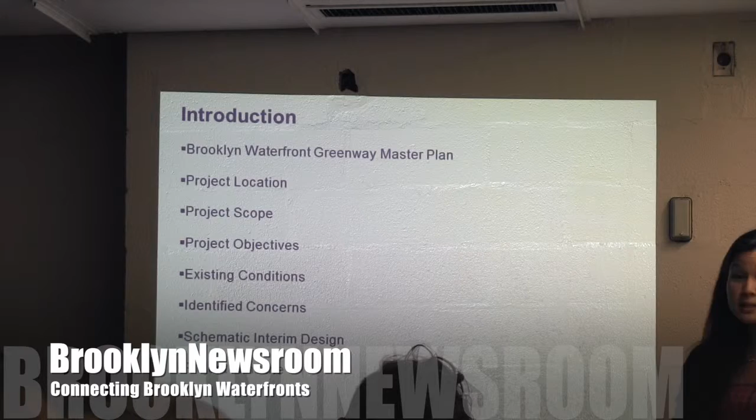A couple things I'll be highlighting in this presentation: I'll be covering a little bit about the Greenway Master Plan, project location, scope and objectives, existing conditions, some concerns we had during the preliminary design phase, the schematic interim design, and the project timeline, where we are today.

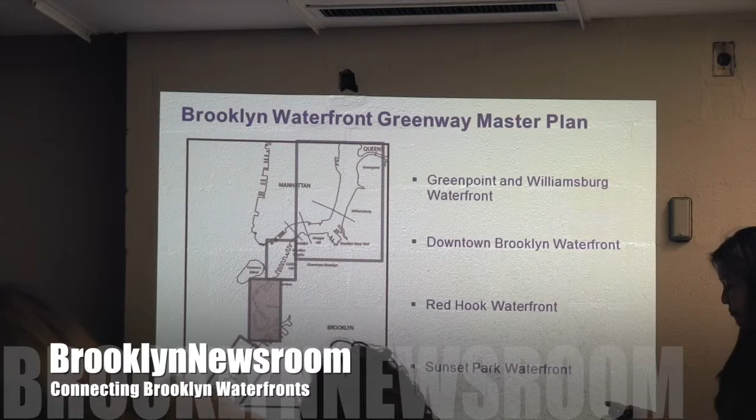There are 4 waterfronts in the Brooklyn Waterfront Greenway: Greenpoint Williamsburg Waterfront, downtown Brooklyn, Red Hook Waterfront, where the Valentino Pier project is located, and at the south part of Brooklyn, Sunset Park Waterfront.

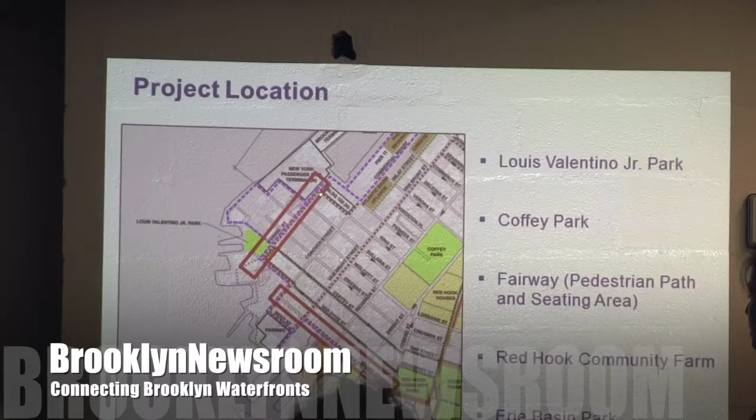The project limits for the Valentino Pier project are Ferris Street at Van Dyke to King Street, and Beard Street at Conover and just east of Dwight Street, about 200 feet.

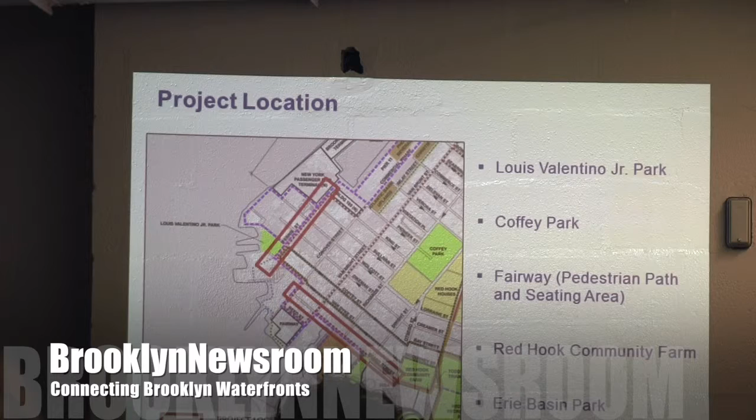A couple of key facilities I'd like to point out are the parks in the project area: Louis Valentino Jr. Park, Coffey Park, Erie Basin Park, the Fairway with pedestrian and seating area, and Red Hook Community Farm. All very close to each other.

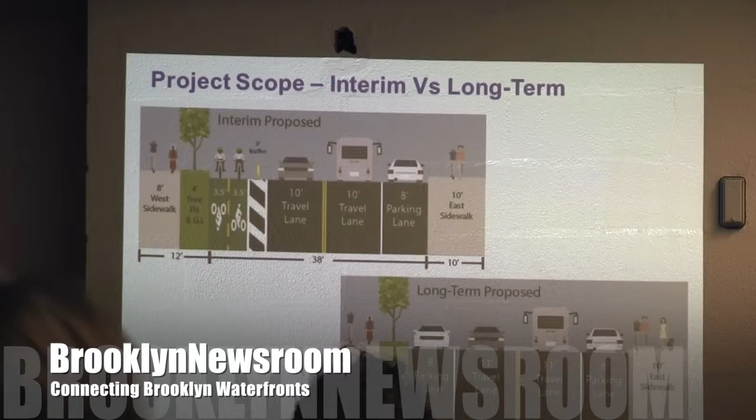The long-term proposed design is dependent on future development in the area. With future developers coming in, there's the possibility and opportunity to move the greenway towards the waterfront side, and the option of putting the parking lane back to 2-way travel with parking lanes on both sides. I just want to make that clear.

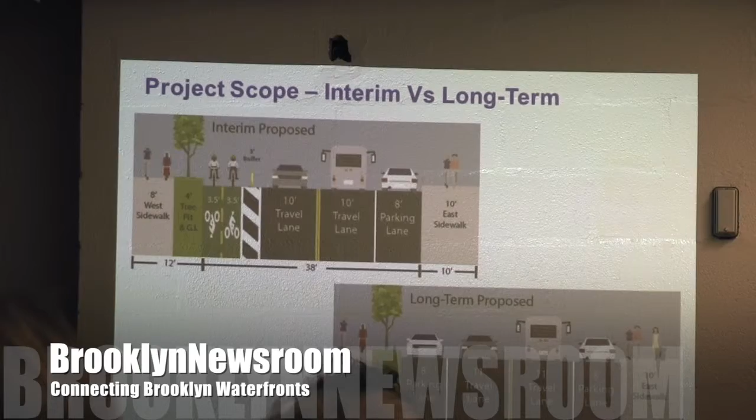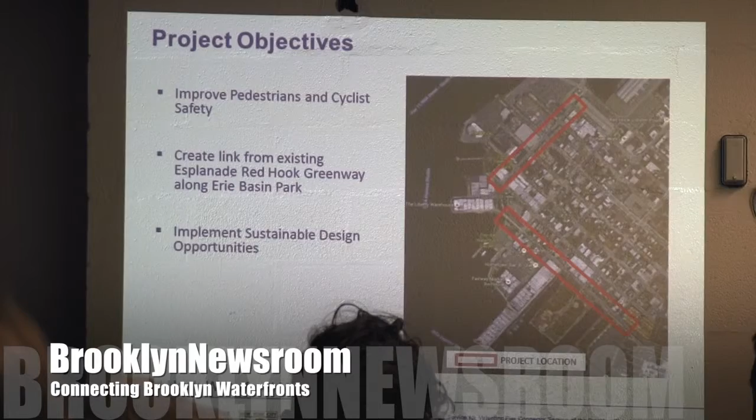Some objectives and goals we have: improve pedestrian and cyclist safety, connecting the existing Esplanade at Red Hook to the Erie Basin Park, and implementing sustainable design at every opportunity that we could.

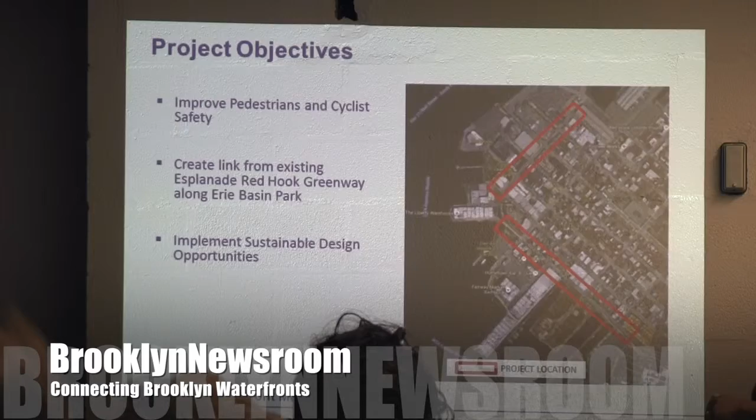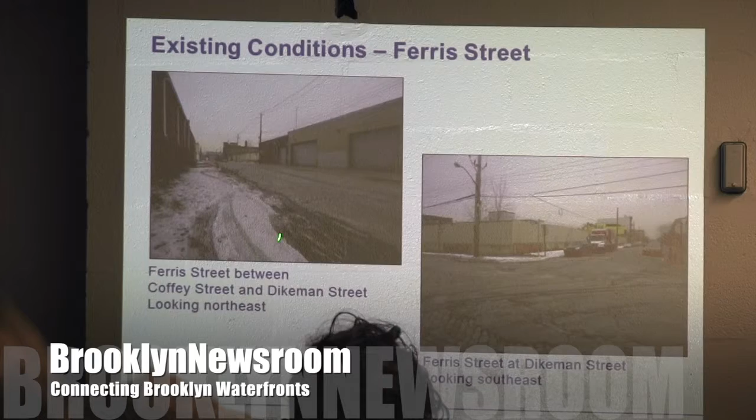These are some photos of the existing conditions. At Ferris Street, between Coffey and Dikeman Street, there's no existing sidewalk. This is a picture of the roadway at Ferris Street at Dikeman Street, and it's cobblestone mixed with asphalt. The road is in poor condition.

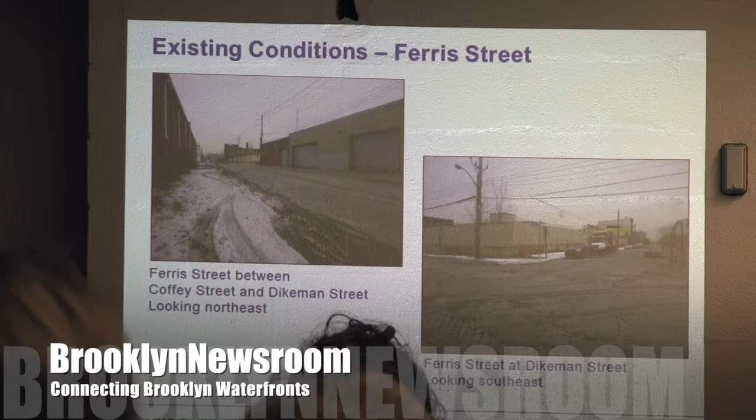Again, on Ferris Street at Wolcott, the sidewalks are in poor condition, and there's no current sidewalk at Ferris Street and King Street.

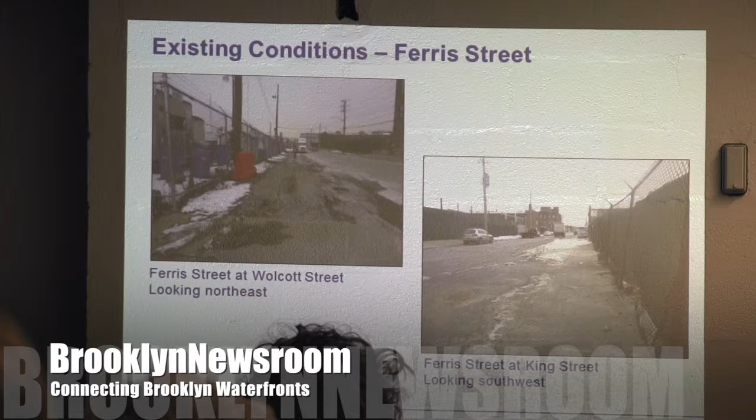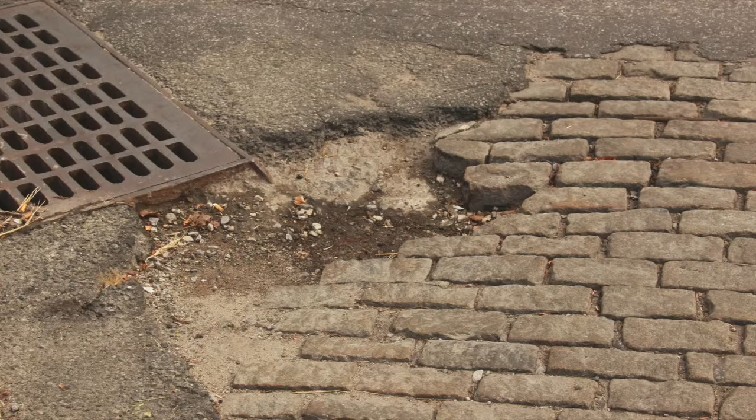On Beard Street, this shows the asphalt and cobblestone mix. Again, roadway both in poor condition, and no existing sidewalk here on Beard Street between Van Brunt and Richard Street, looking southeast.

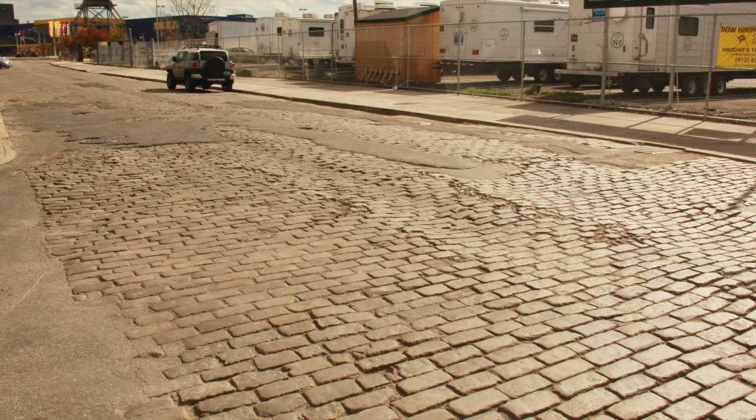Beard Street again, sidewalk is in poor state, and the roadway right here on Beard Street at Richard Street.

A couple of concerns we had while designing the preliminary design: always to enhance the safety of pedestrians and cyclists, facility access - how are we getting to these playgrounds, how are families and pedestrians getting there safely and easily in the area. Narrowing the traffic lane is a documented traffic calming measure used to create safety throughout the environment of the roadway.

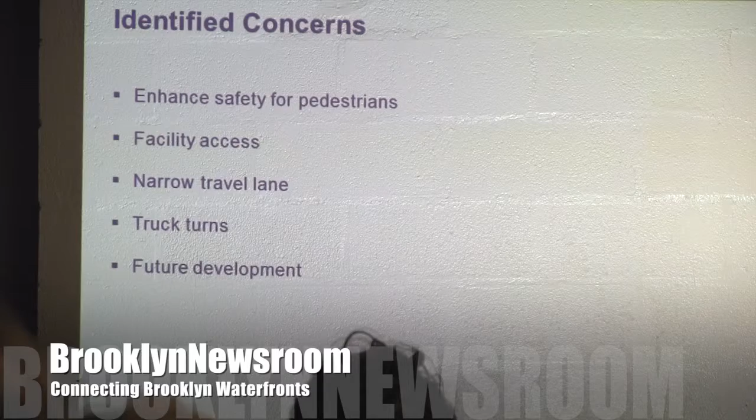Truck turns - this is a zoned manufacturing, commercial area with some residential. We want to make sure there's adequate space for drivers to make turns in the area and that they can easily see cyclists or pedestrians, also keeping in mind the future development to come in this project location.

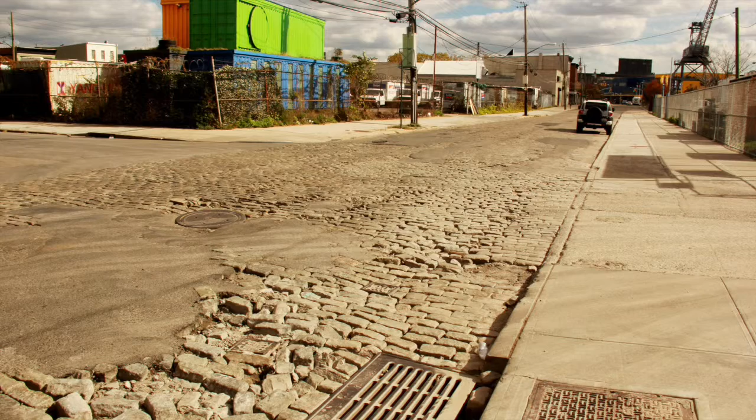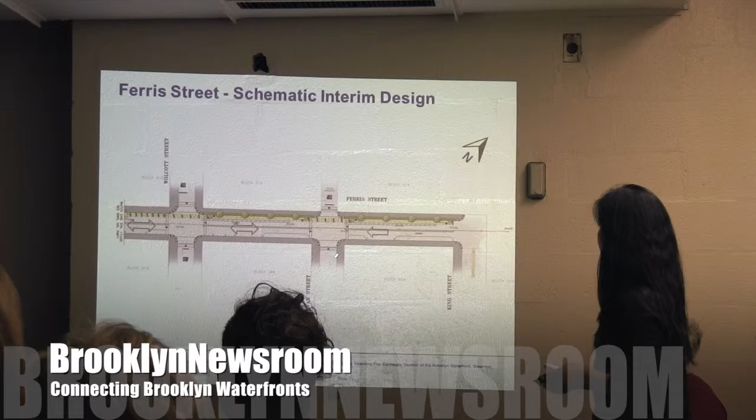This is Ferris Street, the south part of Ferris at Wolcott Street. As you can see, the two-way bikeway is on the waterfront side. Going north, it's a continuous two-way bikeway. The existing travel on Ferris Street is all two-way up until we reach between Sullivan and King Street. In this interim design, we're proposing it'll be two-way throughout all of Ferris Street.

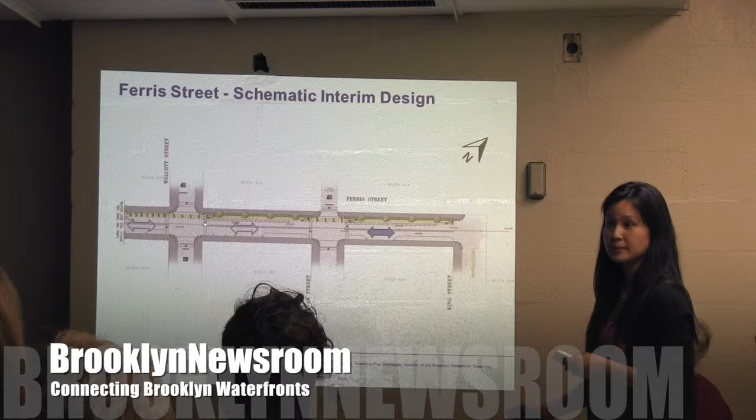This is just a typical section showing what would be constructed out there.

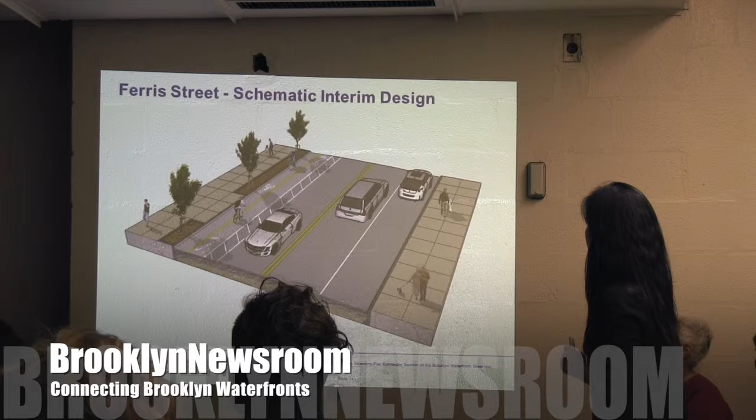On Beard Street, again, this is at Conover on the east side, starting at Conover. Existing conditions between Conover and Van Brunt is one-way northwest. We are proposing this section to be two-way, and the rest of Beard Street going towards IKEA is two-way as well.

And then here's the driveway to IKEA, and then just the end of the project at Dwight Street, just a couple hundred feet beyond that, connecting to this existing bike lane.

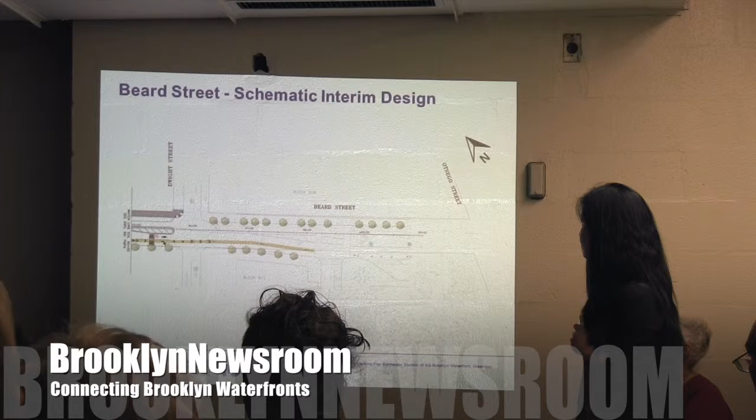Typical section of Beard Street: the two-way bike lane on the waterfront side, and two travel lanes with parking.

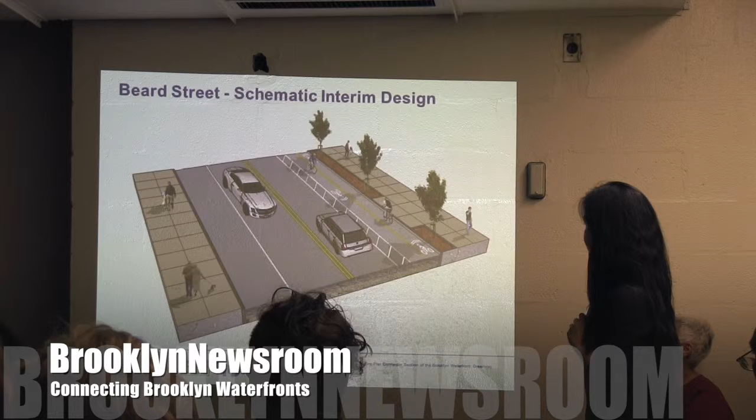In conclusion, I want to state that the Valentino Pier connector section is consistent with the Brooklyn Waterfront Greenway Master Plan, optimizes vehicle, pedestrian, and bicycle usage throughout the roadway, and connects the existing community facilities.

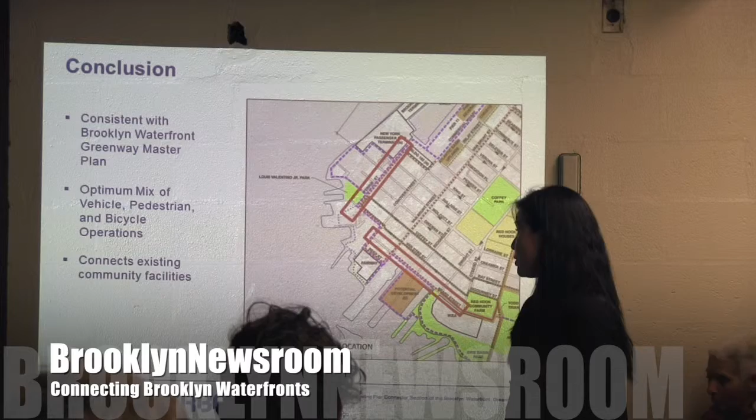So I'd like to open it up to any questions that anyone may have. Jerry, I'm not sure where to start. On Beard Street, between Van Brunt and IKEA, or Richard Street, White Street.

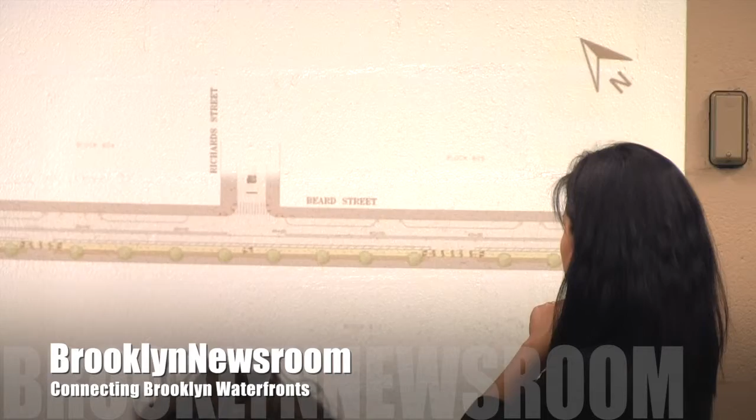Are you going to be changing the parking regulations on the south side of the street? There are currently no parking regulations, with the commercial buildings being rented out you get lots of people parking there, and you have the bus route. So what are your plans for the parking regs? The interim design currently is there will be no parking on the south side of Beard Street.

We are proposing the two-way bikeway on the south side, on the waterfront side. So there's no parking there. Are you going to be repaving it or putting it on the sidewalk? The bikeway won't be on the sidewalk.

So, I don't use a bike, but I'll tell you why I'm saying that. I know what it does to cars going down Beard Street heading east from Van Brunt, basically to IKEA - cobblestones with holes, bumps, and missing stones.

Are you intending to replace that lane with asphalt? We are intending to, it's a roadway reconstruction. I apologize if I didn't mention that. I noticed that it's a full roadway reconstruction for Ferris Street and Beard Street throughout the whole project limits.

You're aware that the community board years ago went on record with the community to keep cobblestones because of the historic nature of Red Hook? I'm aware now.

Part of the problem is when you've been around long enough, you remember those motions that you voted on. Just like we voted on something last night at the community board. Years ago, the community felt that some of the intersections - you can see circular patterns in the cobblestones, that they were patterns in the roadway - and the community board went on record that we want the cobblestones left in Red Hook on the streets. So I don't know how that fits in with your design and your plans.

Well, that's why we're here. This is our first time presenting to the community. My name is Sean Macias, I work with the DOT. That's something we can consider as part of the design. This full roadway reconstruction was going to remove the cobbles, but now that we have heard your assertion, it is something that we can take back.

There was a plan a number of years ago to just repave the parking lanes and keep the cobblestones beneath on the travel lanes. So I'm just throwing that out as a possibility. Sure, it was there a few years ago, didn't get any traction.

DOT did a restoration of cobblestones on Coffey Street between Ferris and Conover, which had significant dips and holes, and they marked some of the spots on Conover for future work. So someone at DOT knows something.